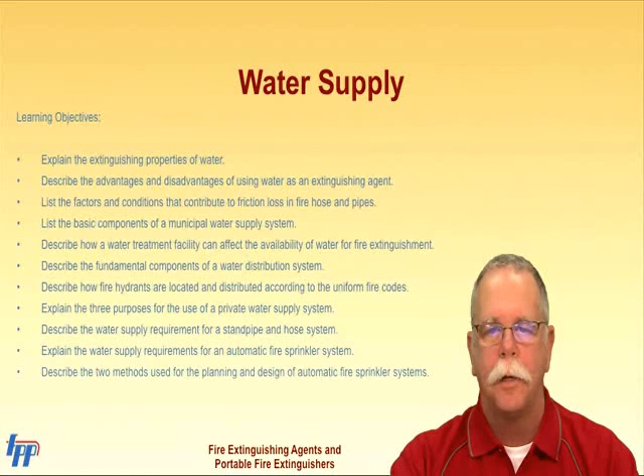Water is the most abundant and available resource for combating fire. Its extinguishing properties are a function of the law of specific heat and the law of latent heat of vaporization, as well as of its surface area when applied, and its specific gravity. In most applications, water's advantages as an extinguishing agent outweigh its disadvantages.

The pressure and velocity at which water is applied also affect extinguishment. Friction loss plays a major role in water's effective application during firefighting operations.

Municipal water supply systems are a major source of water for firefighting. Their primary components include a water supply source, a means of moving water, processing or treatment facilities, and a storage and distribution system. Private water supply systems may be used to replace or supplement municipal systems.

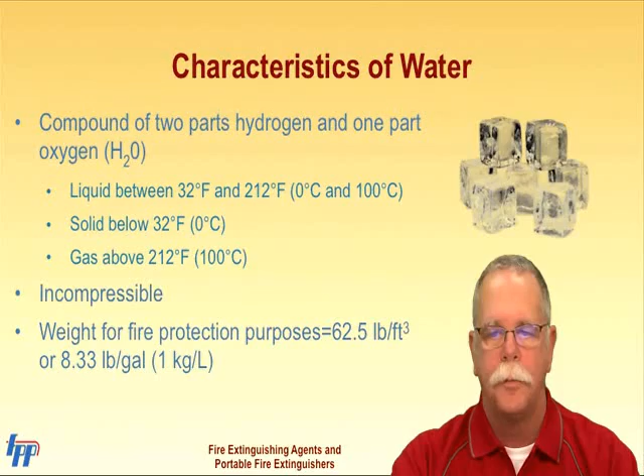The law of specific heat can be considered in similar terms as specific gravity of a material. It measures the amount of heat needed to raise a material a specified amount as compared to raising an equal amount of water to the same temperature. If a material has a specific heat rating lower than water, it will not absorb as much heat. The high heat absorption ability is what makes water a good extinguishing agent.

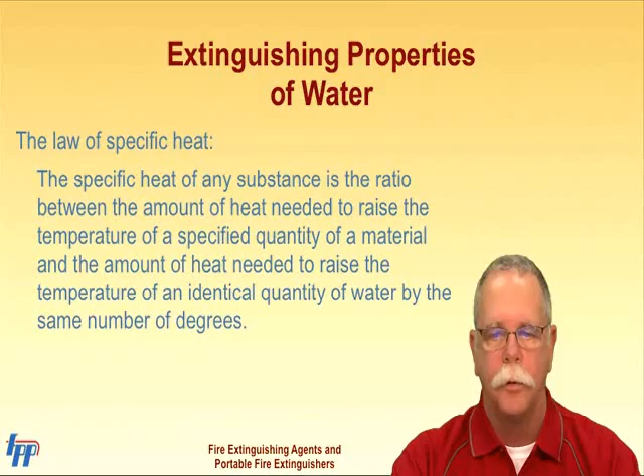The additional heat absorbed by water as it is converted to steam is another reason why water is such a good extinguishing agent.

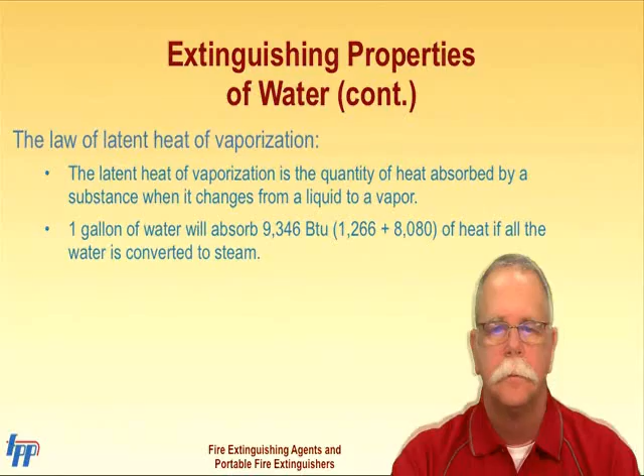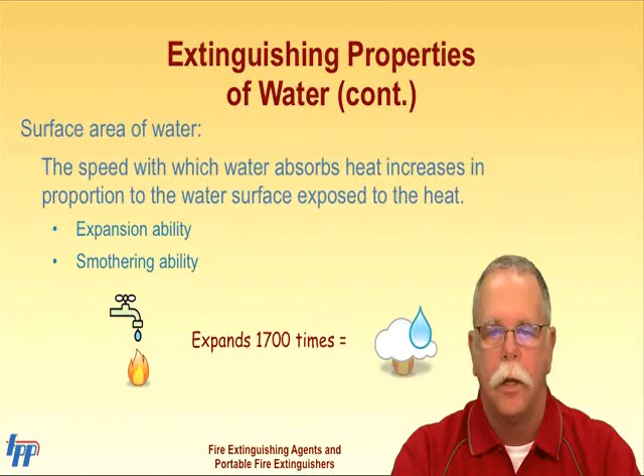The smaller the drops of water applied to a fire, the faster it will absorb heat and convert to steam. When the need arises to get water deep into a building through a high heat environment, this conversion of small drops to steam reduces the effectiveness of our fire stream. Therefore, we need to consider changing to a nozzle that delivers a larger chunk of water to the seat of the fire. A solid bore nozzle would be more effective in this situation.

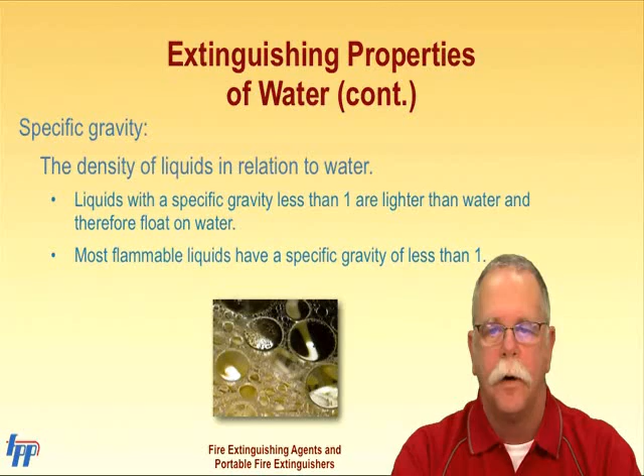The important point to remember regarding specific gravity is that many flammable liquids have a specific gravity of less than 1. Flowing water onto a flammable liquid fire may allow it to spread as the fire floats on the water. This may also be the case if the runoff from firefighting efforts is allowed to carry flammable liquids away.

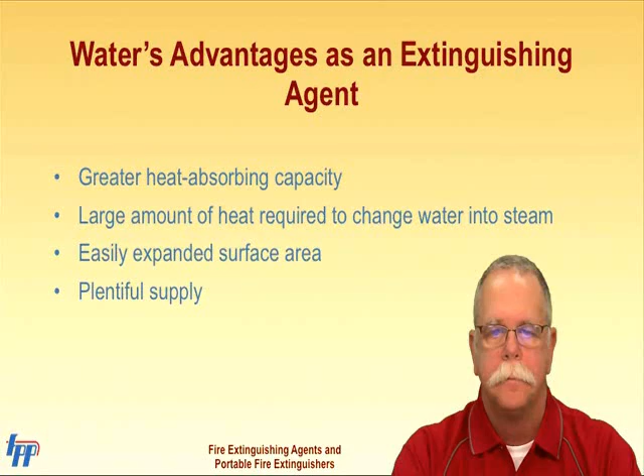While most of the disadvantages of using water as an extinguishing agent may be clear, surface tension may seem obscure. Surface tension prevents water from soaking into a material, preventing full extinguishment, leading to rekindles or continuation of burning as in wildland fires.

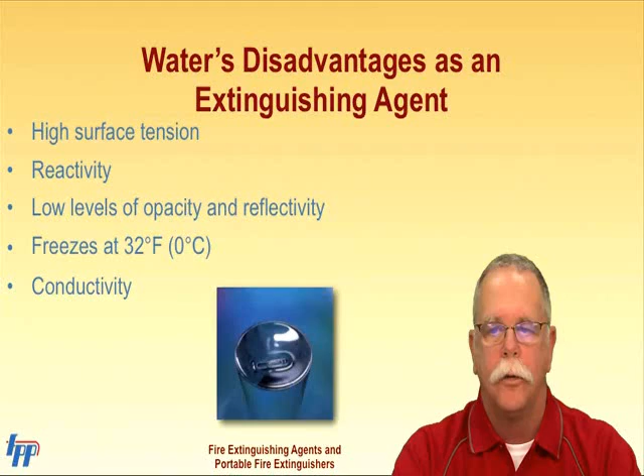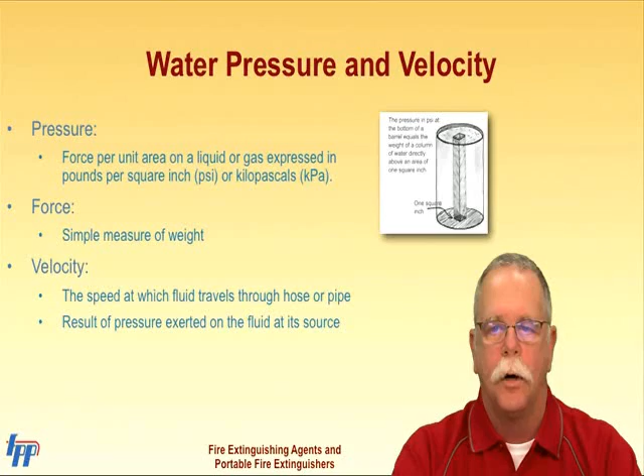Pressure is a measurement of the force that moves the water through our systems. Sometimes it is from elevation, as you would get from a water tank, or it may be generated by a pump. Understanding the principles of pressure will be key to understanding hydraulics calculations later on in your career.

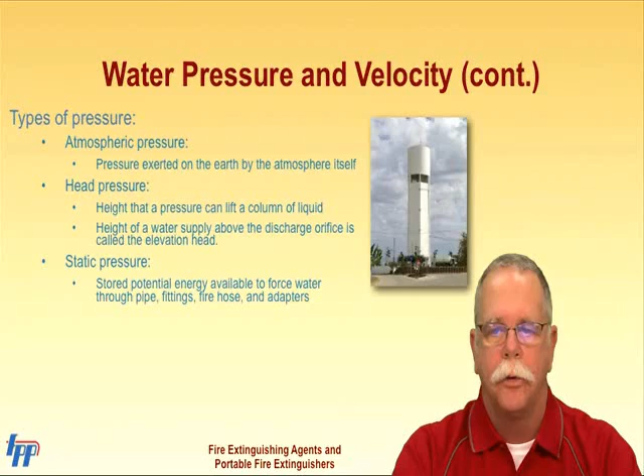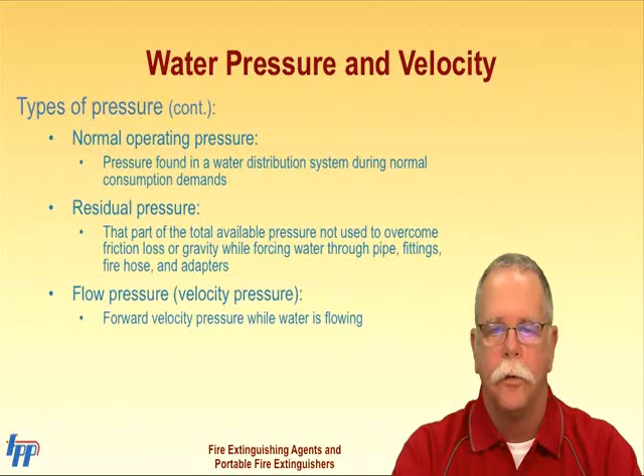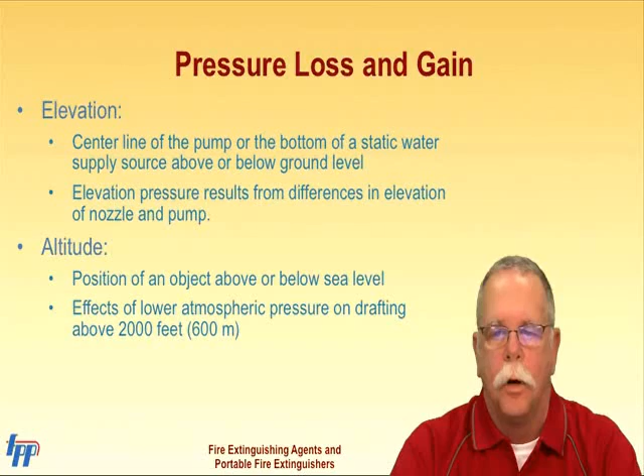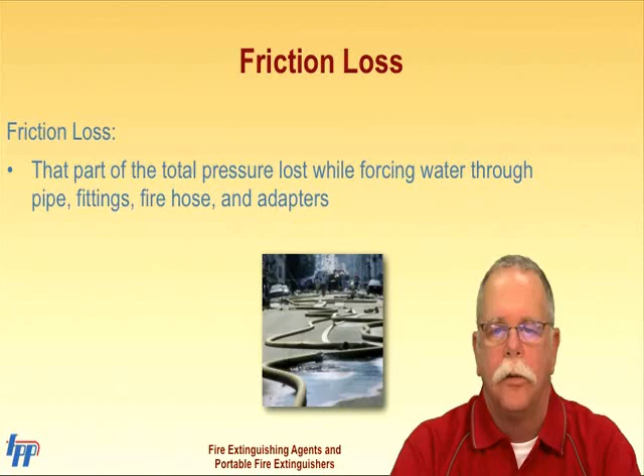Friction loss is directly related to line diameter, length, and the amount of water flowing through the line. A thorough understanding of friction loss principles, and more importantly how to overcome friction loss, is essential to operating lines effectively.

Some of the causes of friction loss can't be controlled by the firefighter. Focus on those that can.

Fire hose lining: you may not be able to control what the lining of your fire hose looks like, but you can lay the shortest line possible to meet the needs of the fire attack. Have adequate line, but not a bunch of extra.

Hose coupling and pipe fittings: hose couplings should be at least the same size as the hose that they are coupled to. Gaskets should be in good shape, not protruding into the flow. Use only the fittings and adapters that are required for the lay.

Know your pumper. Knowing which discharges have many elbows or small plumbing or valves will help you extract the maximum amount of flow from your apparatus.

Sharp bends: lay lines as straight as possible, never allowing a hose line to flow with a kink in it. Kinks not only cause friction loss and reduce flow, they may even cause damage.

If the fire which you are fighting is going to require that you extract the maximum amount of water that a line can flow, consider using the next size up line. Increasing the line size is the easiest way to reduce friction loss.

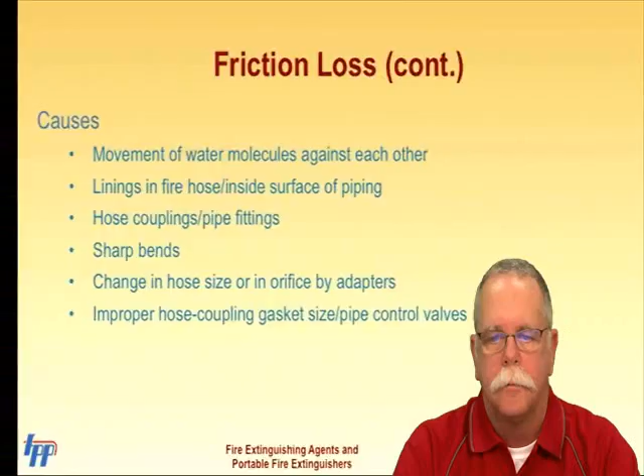To overcome friction loss, consider the following: length of the hose lay. The shorter the lay, the less friction loss for a given diameter line. Again, have an adequate amount of working line at the destination, not a bunch of extra.

Amount of flow: if you need maximum flow from a line, go to the next line size up. This may mean laying a 2.5 inch line initially and reducing to a 1.5 inch line for finishing. Perhaps the initial call will be master streams at the flow requirement near the upper end of what you can flow with your 2.5. Remember, if you can't deliver enough gallons per minute to overcome the amount of heat generated by combustion, you won't put out the fire until it peaks and the fuel supply starts to become exhausted.

If your friction loss problem is in your supply line, use a larger supply or lay parallel lines. Pulling 1,000 gallons per minute from a single 5-inch supply, the water has to move at a velocity much greater than it would to get 1,000 gallons per minute from two 5-inch supply lines. Increased velocity equals increased friction loss.